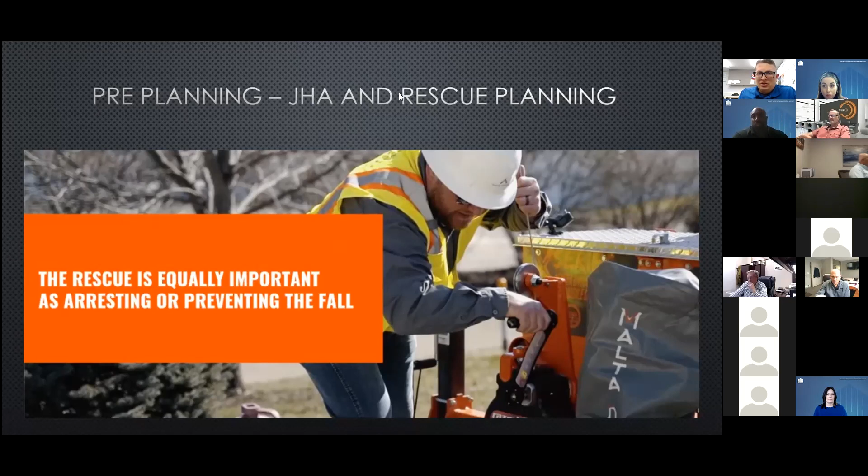And some examples that we put together for you: there are plans and procedures that you can have in place as a company to help with that, making sure that your workers in the field are trained properly and have the proper resources to execute a plan. So I'm going to show you a couple of examples. The first one is a working at heights rescue plan for somebody that doesn't have their own rescue teams and doesn't have a rope access team on staff that can go out and perform rescues. This would be working on a step-by-step process, going through each one of these boxes and looking at, okay, what am I doing?

What kind of work am I doing? And we just check off these boxes and kind of go through. It also takes care of our training piece that we're required to do per OSHA for our fall protection site-specific plans by going through this with our employees and having them sign it. And again, it's just a yes/no question.

You're asking, in the event of emergency, who are you contacting? Who are you reaching out to first? If you have a job site that you know is going to be a 45-minute lead time for fire and rescue to get there, are you going to contact fire and rescue first? Or are you going to contact your rescue team first? You're most likely going to contact your rescue team first and then contact fire and rescue, because your rescue team is going to be the first on site to respond, and you want to get them on the road as soon as possible.

On the other hand, if you have an event and you're in a downtown core, you're probably going to contact fire and rescue first and then contact everyone else. And that's kind of the way it works. So just knowing those and making sure your guys out in the field know those and know what am I supposed to do? What is the procedure? What is the process to deal with this?

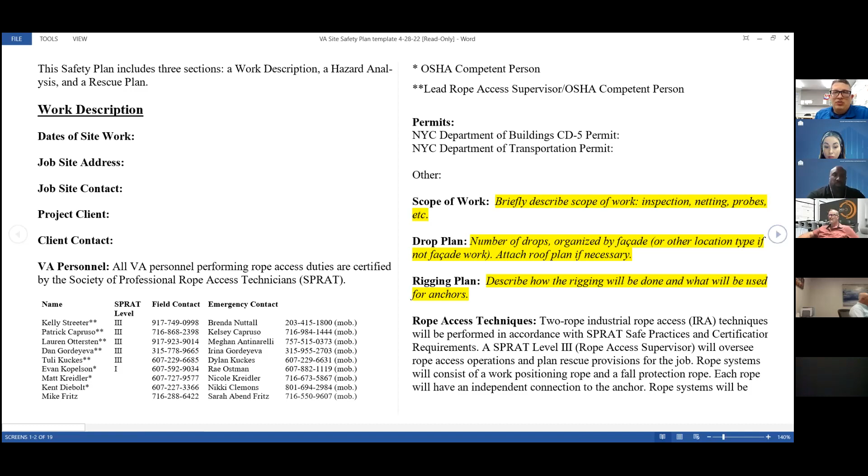And if you're working in a situation where, for example, I'm working out in the middle of nowhere and I don't have a high angle rescue team from a fire department, I may need to get someone trained up to this level to be able to perform rescue and be on site. I may need to hire a contracted company that has those resources so that they can be on site while I'm performing work. So if something does happen, they're able to respond to it. Having that kind of planning is what will make a successful rescue happen.

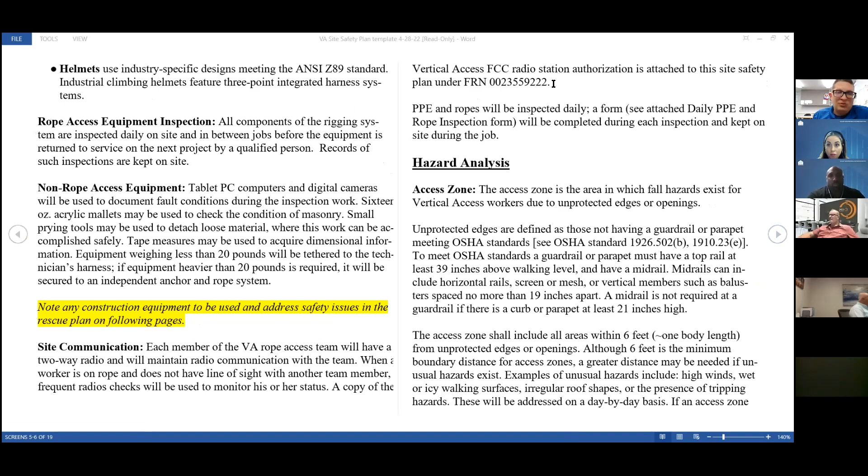So this is one you'll see in here, types of rope grabs, types of harnesses, what are their procedures for performing a rescue. And then the last thing that I'm going to share with you guys in regards to procedures is rescue procedures. And every job site should have a set of this, a template like this on their job site. This is your emergency plan. This is what you're going to do. This is what you're telling your superintendents and foremen. This is what you need to do.

If something happens on this job site, this is the document you go to and you follow the directions within this document. And it tells you, testing and training, we do this. This is how we do this. And then it gets into the rescues. So rescue procedures. A good example here, a rescue from an elevating work platform.

So if an elevating work platform is available on site, and the suspended worker can be reached from the platform, follow the procedure below. This makes it very simple for your workers out on site to know exactly what to do to perform a rescue. They don't need to wait for someone to get there. And that's important. The less time that we spend on the line or hanging from harnesses, the better off we are from having a worker have permanent damage to their body from that fall.

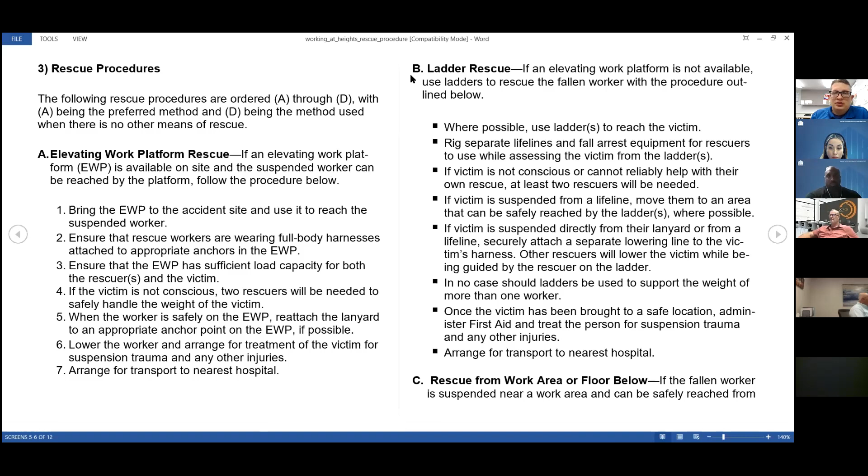So before work begins, we always have to train workers on self and assisted rescue. And we need to provide the rescue equipment on site. That may be as simple as providing them with trauma straps and training, but on some sites we need to provide them with more than that.

And if we have swing stages on site, there are ways to rig things to where you don't have to put rescuers out on the side of the building. If you have a job site out in the middle of nowhere, then you can rig from the top and have lower-from-the-top systems where you can lower equipment and lower workers. And we're going to show you more of that. I'm going to show you some systems that lower workers.

And then Jim's going to show you guys some systems that you can lower all of your gear out without ever having someone exposed on the side of the building. Those systems are expensive, but if you're in a situation where you're on a building where rescue is not available, it is a good alternative to having rope access technicians on site.

So we really have three scenarios that we're going to share with you. Scenario one is a swing collapse, and we have workers hanging from personal fall arrest systems, and we don't have local emergency services. There's a situation where we're working in a building. There's no high angle rescue team. We could be working on a structure, and we know that we don't have the fire department.

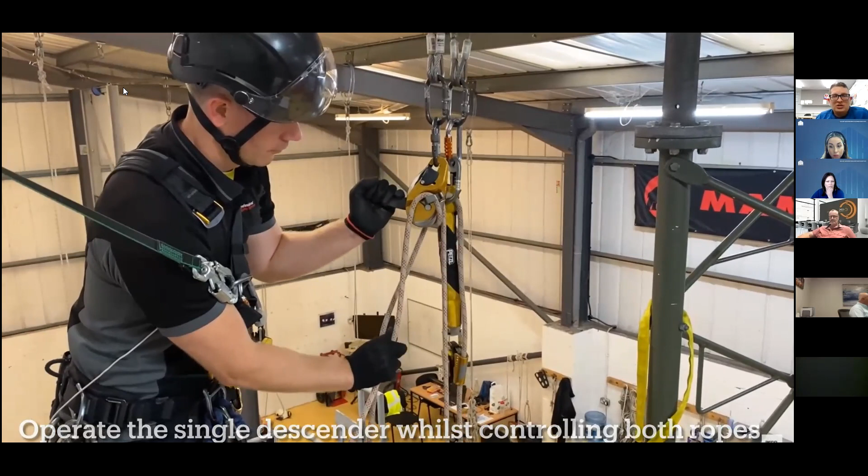So guys, what this is showing is a rig-to-lower system. We're actually currently using this on a few of our job sites. Most notably, we have a job site in Bellevue that is a very hard access. So we have it set up with rig-to-lower systems. So if a situation happens where we have a worker suspended, we can lower them very quickly.

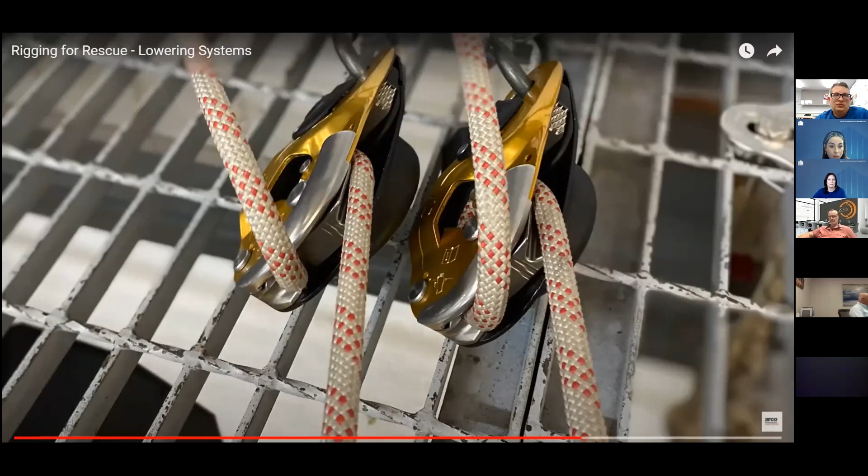So make sure. So that's kind of the idea behind rig-to-lower systems. You guys can use those when there is no emergency personnel available to provide a rescue on site.

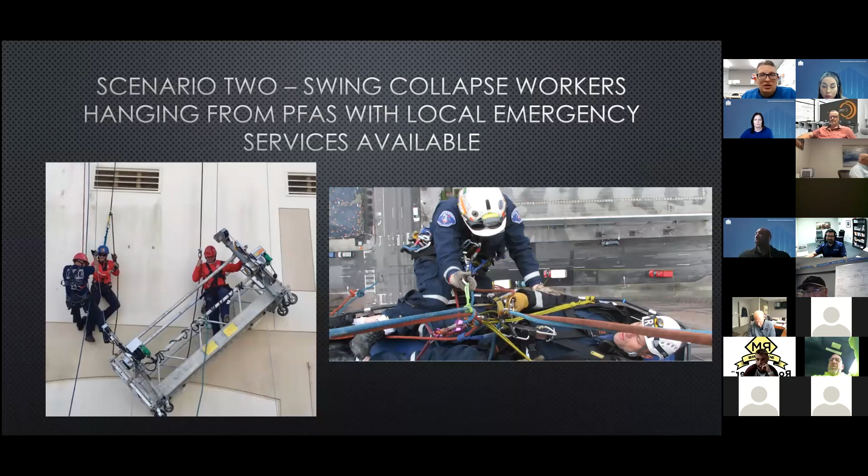The second scenario that we're going to talk about is a swing collapse with workers in personal fall arrest systems again, but with local emergency services available. And this is where we go back to that pre-planning and pre-task planning, that we have to have our procedure set in place. And again, contacting the right services.

And then making sure that we as a company have an understanding with all of our supervisors on site that when the emergency personnel arrive on site, they're kind of directing the flow. They kind of take over everything and they're going to tell us what they need from us instead of us telling them what we need from them. And then they're going to provide rescue in that situation. The common goal that most companies have is to keep fire and EMS off their job sites.

And you can do that if you have the trained workers, when you're in the swing stages, if you really pay attention and your workers are well trained on being able to provide self-rescue in most cases. If this does happen, we just want to be prepared for it. We want to have the right procedures in place, the right policies in place.

We want to make sure that our workers out on site understand who to contact and what numbers to call when an emergency happens. It's not always 911, right? In some jurisdictions, for example in Seattle, you don't call 911 in the event of a high angle rescue situation. You call the special operations team of the Seattle Fire Department. To get a quick response, if you call 911, you're going to go through dispatch and all kinds of stuff to get to who you need to talk to.

If you have their number directly on the job site, you can contact the high angle team right away, get a hold of them, see where they're at, what their duration to job site is, and get that ball moving a lot faster to get the right people there. So just pre-planning and preparing for that.

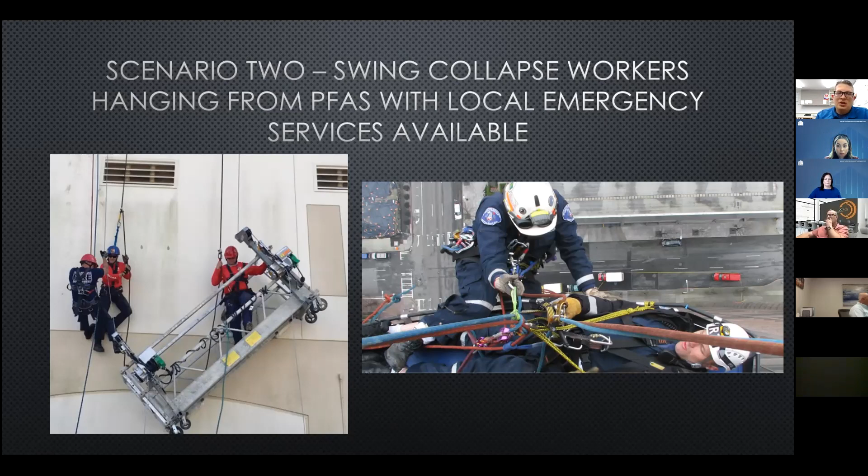At this point, I'm going to turn it over to Mr. Jim and our scenario 3, which is a swing is disabled and the workers are on platform and inaccessible from buildings, interior, or decks. So, Mr. Jim.

Nicole, I'm getting an error message. It says host disabled participant screen sharing. You are good to go now. All right, sorry, when you logged back in that last time, I forgot to reset it, so you should be good. No problem. Am I showing my screen? No. Screen share. There we go. Okay.

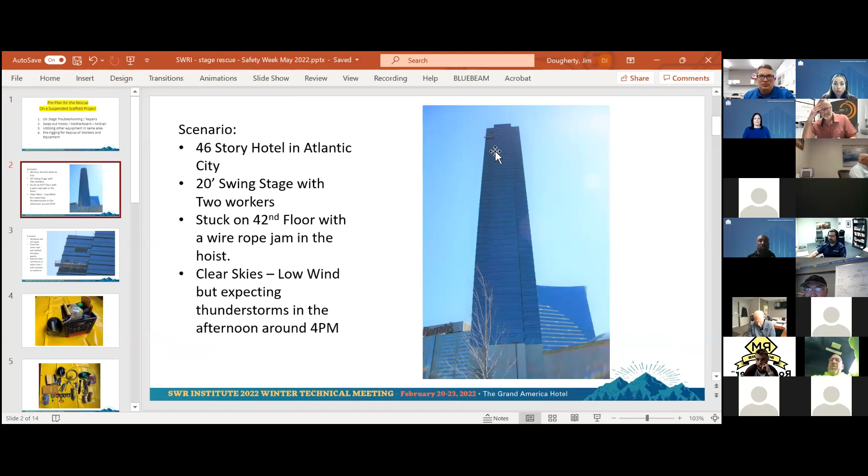All right, the part of the presentation I'm going to do today is somewhat of a refresh of what I did in Salt Lake on rescuing equipment, but also just some things that you can think about during your pre-plan and maybe some products or parts and pieces to your plan that you can add to make life a bit easier for you. In Salt Lake, we talked about a down swing stage that has an incapacitated motor on a building that has inoperable windows and basically a shear wall at the elevator bank where you can't get guys on and off the swing stage.

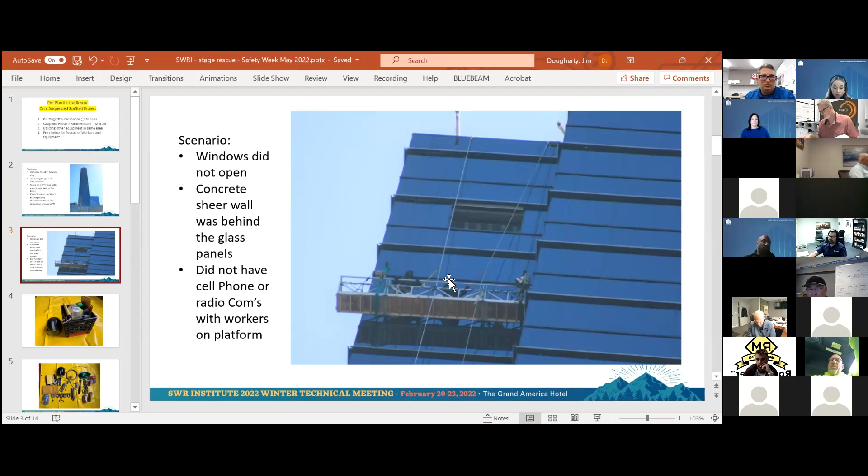This wasn't really a pre-planned job. This was a job that I got called into, one of my customers had in Atlantic City. Since then, it's become a part of my training and part of my pre-planning as I go forward. This day, I happened to be in Atlantic City and I happened to have a kit that I kept in my truck of miscellaneous parts and pieces that I use in the event of a down motor or down equipment. It wasn't difficult to have or to keep in my truck, but it made this situation much easier.

And since I did the presentation in Salt Lake, I've had 3 or 4 different people call me asking me what parts and pieces I keep in my kit. And I think they're actually starting to utilize these, keep them in their foreman's vehicles or back at the shop and keep it available.

The key parts of what I used that day: the situation on that job was the swing had a problem with the motor that had a wire rope jam. Fortunately, they had an extra wire rope and an extra motor on site from another swing stage, but there were parts and pieces they didn't have to make this rescue work really well. If my arrow is showing you right now, there's a bracket right here called a heavy duty tang or heavy duty motor mount, and a 20-foot truck strap is what I had to make this job work.

If you guys keep this as a part of your plan, or you keep these parts and pieces in your truck, it'll make a scenario like this easier, which is not totally uncommon, to have a motor having an electronic issue or a mechanical issue based on just a mechanical failure or things that your guys do on the site that get inside the motor that cause problems. But if you look at the device we have right here, it allows you to basically take a motor, not have a permanent mount on the swing stage, and attach it onto a strap.

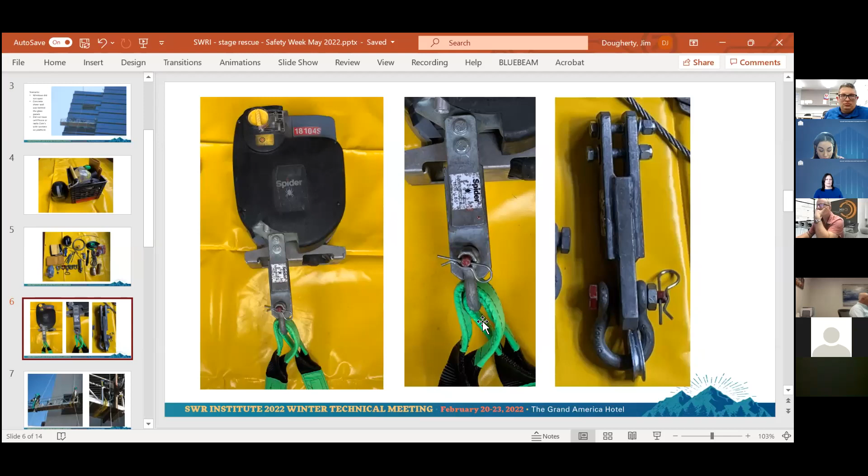The 20-foot strap that we used that day worked out perfect for us. It just happened to be what I had in the truck. But what it allowed us to do, we lowered a motor down to the swing stage, lowered additional wire rope down to the swing stage, made our connection with the truck strap, that heavy duty tang on the bottom of the motor.

And then what it allowed us to do was take the plug out of our original hoist, plug it into that hoist, use that hoist to lift up and take the load off the original down motor, lower the wire rope back down to the swing stage. And then we operated this motor as if it was the original motor. The other motor was in good shape and allowed the customer to bring the swing all the way down to the ground 46 stories without having to call fire rescue, without having to do any kind of a major plan.

It took probably about 3.5 to 4 hours to actually accomplish this task, only because it hadn't been planned out ahead of time. And there were certain parts and pieces that we didn't have that we had to locate locally down in Atlantic City. But as a part of your plan, the more common issues you're going to most likely have, and I think if I had people's faces on their screen, I could see them nodding up and down, is motor issues, whether it be an electrical issue from feeding it with low voltage or a wire rope jam issue that causes these kind of problems.

The fact that the swing was still vertical and it wasn't laying horizontal and it wasn't in a scenario where these people on the swing stage were any kind of a hazard. It was more of a take your time, figure it out, get the swing down to the ground. Had we called fire rescue and fire rescue came and took the people off the swing stage, we now would have had the problem of having a swing stage 46 stories up in the air with nobody on it, that you then had to put people back onto the swing stage and still try to accomplish this task.

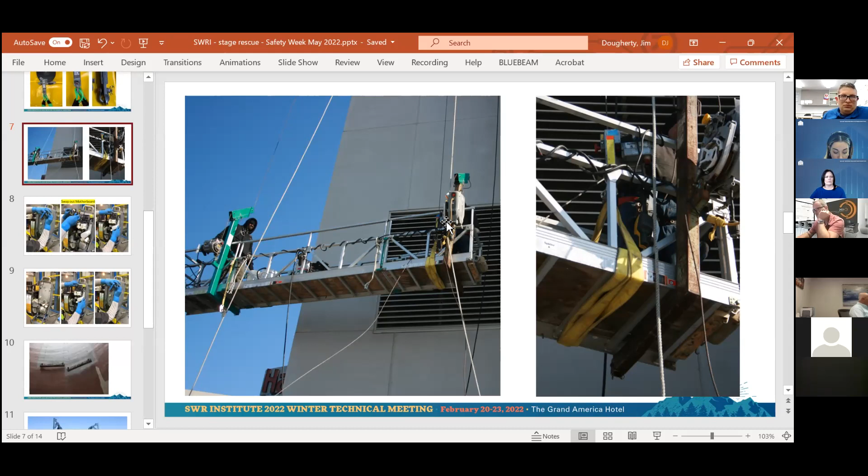There are ways in the newer hoists that are out right now where everything's on a motherboard, which is contained on one single board. And with a little bit of training, if you had a scenario like this, and once again, where your swing is still level and your men are not in any kind of a hazard situation, they could be trained to take a motherboard out of another motor on the property, or you could bring a motherboard to them or another motor.

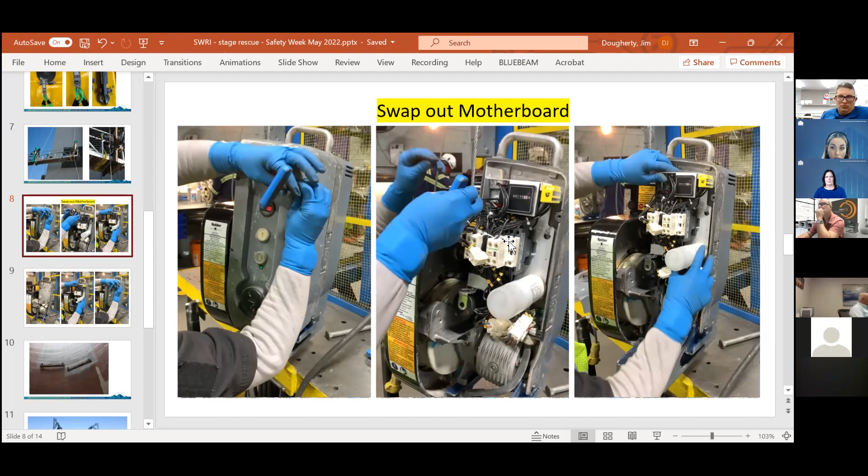Instead of having to lower a 130-pound motor 46 stories down on a piece of rope and have them do a major change out, it could be as simple as taking 4 screws out of the front of the motor, taking the front housing off, just connecting a few 6-pin connections, taking the motherboard out of the motor, swapping the second motherboard back in, putting it back together and going back to work. So it's not very common. It's a nice feature to have in some of the hoists that are out there these days.

But once again, it doesn't involve rescue. It doesn't involve putting people on ropes. It doesn't involve people swinging a hammer and breaking a piece of glass and climbing into a building. And the people that are actually on the swing stage are comfortable on swing stages. They're trainable and have been trained in other operations you have them doing on the wall anyway.

So this small portion of training is not difficult to bring them up to speed and to give them a little more level of security and the level of training and knowledge that they can get themselves down in a scenario without having to involve helicopters and fire departments and police departments and everybody else in OSHA. So there's certain things that you can add as well.

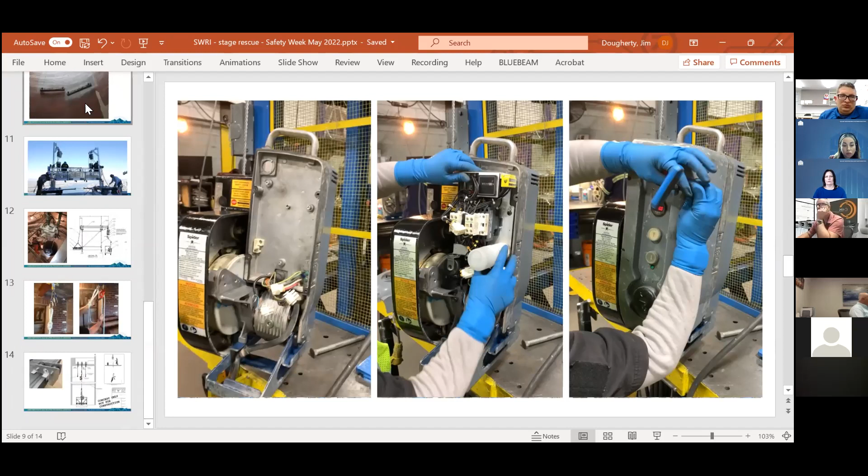It doesn't have to be a long-winded plan. It can be, I'm going to use the swing that's next to it. I'm always going to have a swing next to the one I'm working out of. And we can use that swing as our rescue plan or as our secondary egress from the platform itself.

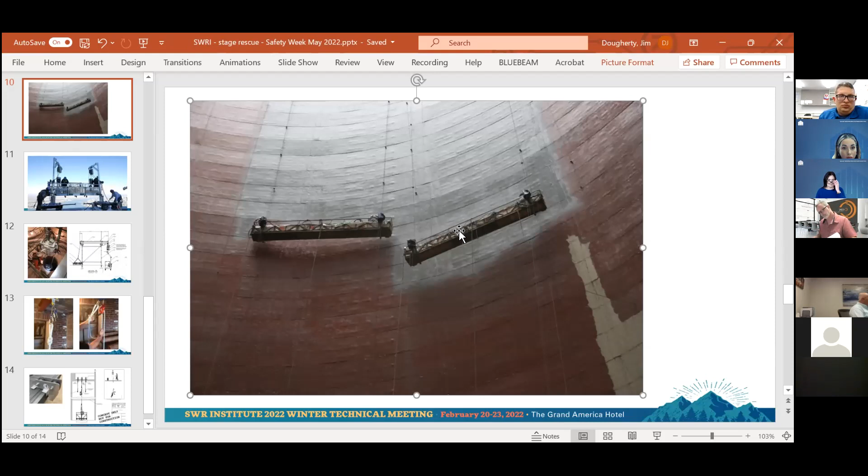The other scenarios you get into, which is a little bit more specialized, Mike mentioned it earlier about rigging from the top. This was a scenario where the building was 1,500 foot tall. So the weight of the platform, the wire ropes and the power cord would not allow the swing to go all the way to the rooftop in a temporary scenario and still maintain its overall load capacities. So we were working on the top 150 foot of this building, and we basically rigged the swing stage with primary motors that actually operate the swing up and down.

And if for some reason the workers got down 150 foot or so, since they couldn't go all the way to the ground, we could use the motors that are hanging from the rigging devices up top and actually pull the entire swing stage and the workers back up as well. So if you're in scenarios where going down isn't always the best thing for you, going down could be water. If you're working on bridges, going down could be obstructions or railroad tracks, whatever it may be.

If you need a way to bring them back up in the situation where your motors fail or your people fail, you can actually double rig it where you have primary motors for operation of the swing and secondary motors rigged for rescue that you can use to actually accomplish your rescue task without a lot of planning after the fact. When you do all your pre-planning, there's really not a lot of scenarios that this would not affect the rescue in, unless you completely lost power and then none of the motors would work. But up until that point, you could find a secondary source of electricity and utilize the two topside motors to do your rescue if you had to.

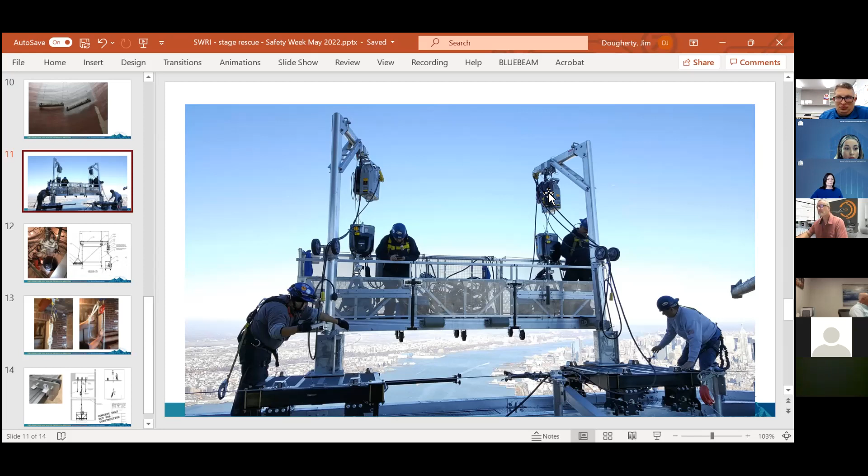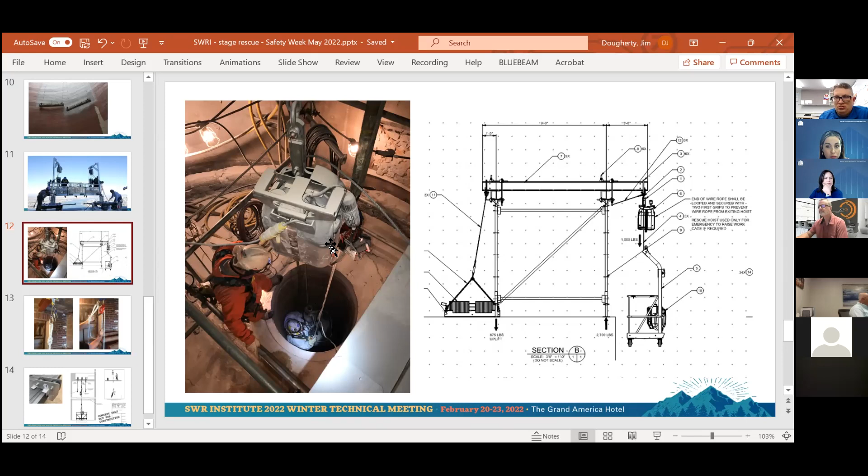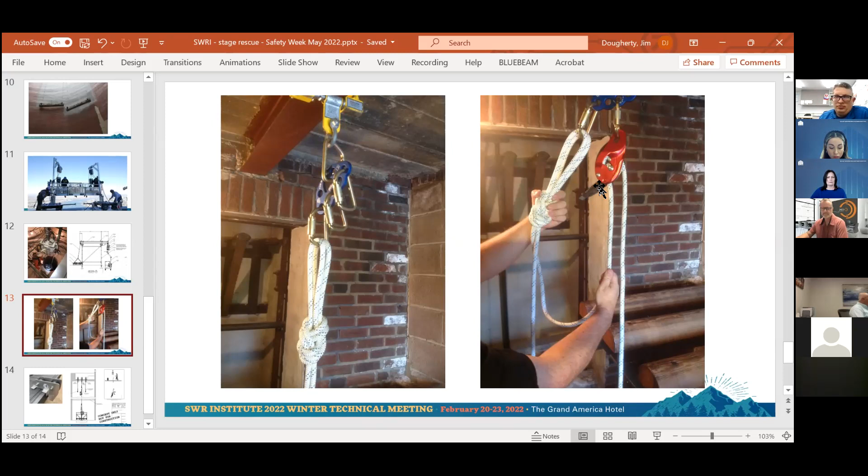That doesn't allow you any kind of a lowering because you only have about 20 foot of rope up on the rooftop past your knot. So like Mike was showing there, in this scenario, instead of giving yourself a hard stop at a knot, you can run it through a lowering device or a Petzl ID as they're called. And then you would have another 200 foot of rope in a bag up on the rooftop. If for some reason the person fell out of the swing, or a wire rope broke on the swing, whatever it may be, you could use that device.

Or actually, before you even had to call 911 or get someone on location, you could use that device as a part of your rescue plan or your work plan so that if something happened, you can lower the person down another floor to a window level they can get off at, or all the way down to the ground.

So that's about all I had to show you. It's just trying to make you think that there's not always one way to skin the cat. There's different devices out there and different things you may utilize to make this work. But it's not always the best thing to call 911 when you have a problem with the swing stage, because you still have the problem with the swing stage.

So if you can train your workers to do troubleshooting and to identify what the original issue is, you may be able to use them also to get the swing stage down to the ground and eliminate the hassle of having to get someone back onto that platform, get it down to the ground, and then go back to work. And it's going to cost you a lot more man hours if you have to go back into that scenario and pull that suspended scaffold back down without people on it.

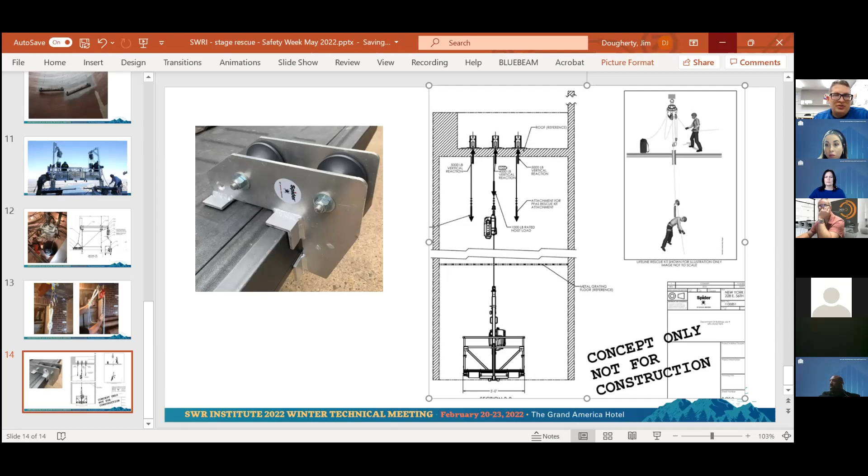Technologies have changed, and that's just a simple fact. Technology has gotten better over the years. And that's when we've gotten into IDs, we've gotten into rig to lower, and we've gotten into using better, more stable, more reliable ropes. And that's what we're trying to kind of show the group.